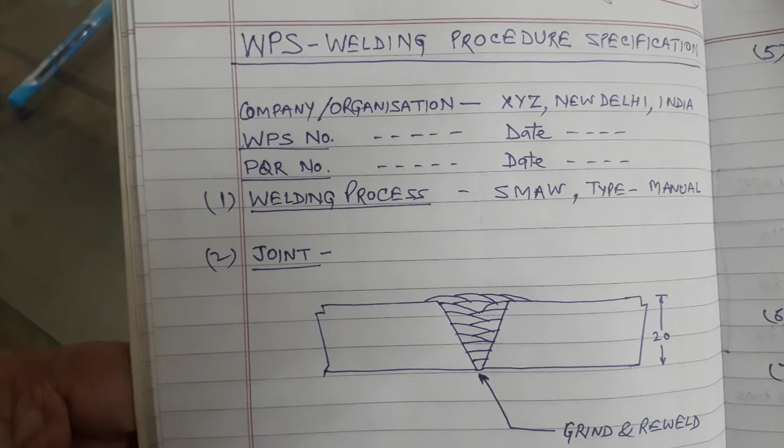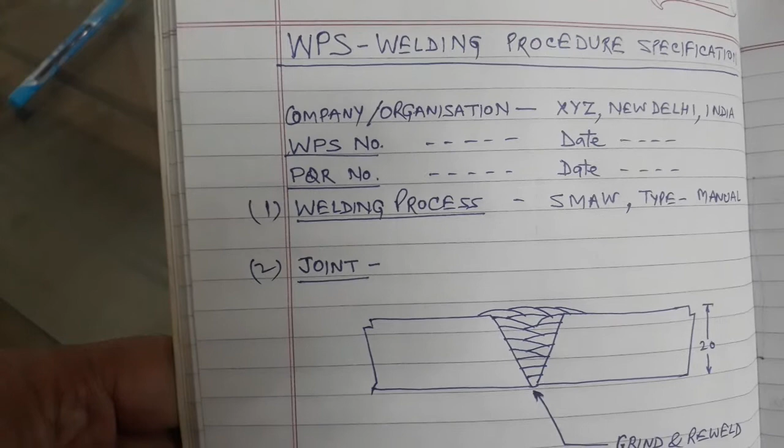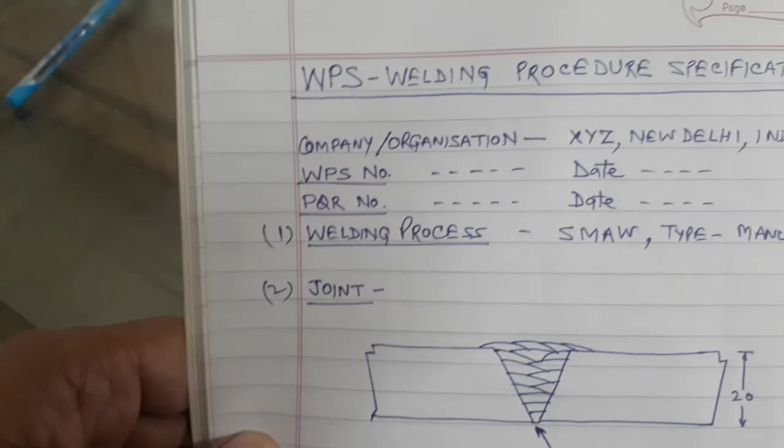Hello friends, this is part 2 of WPS, welding procedure specification. This topic I have covered before, but you could not see any document or figure, and I felt that in the absence of a document you couldn't have followed it well. So as an afterthought, I decided to make it in a document format so that it will be better to understand how WPS looks like. Now you can see it is in a documented format.

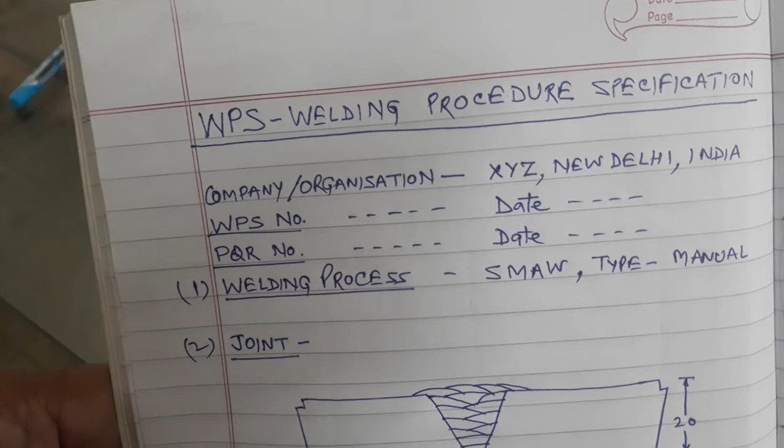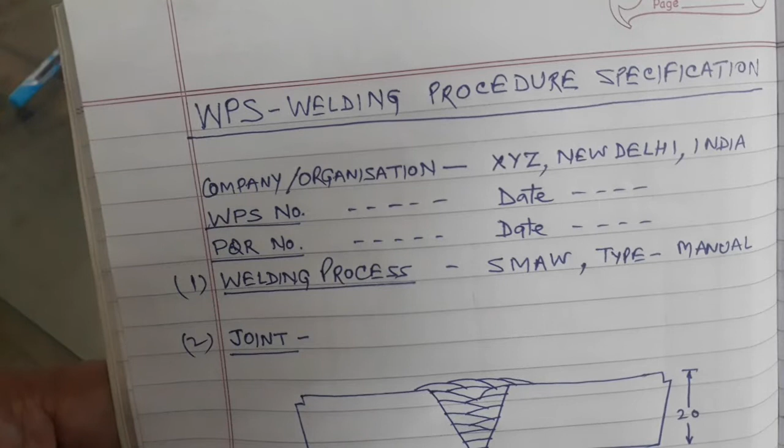On top of this WPS document, the first thing which will come is the company or organization's name. Now here you can see that it is XYZ, New Delhi, India. That means a company will give its name.

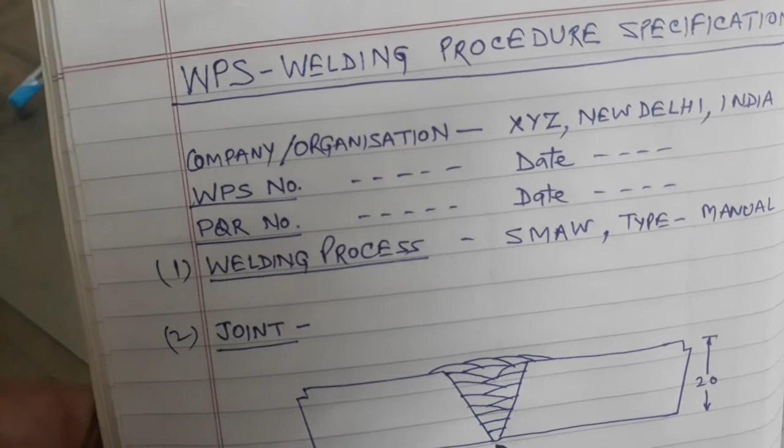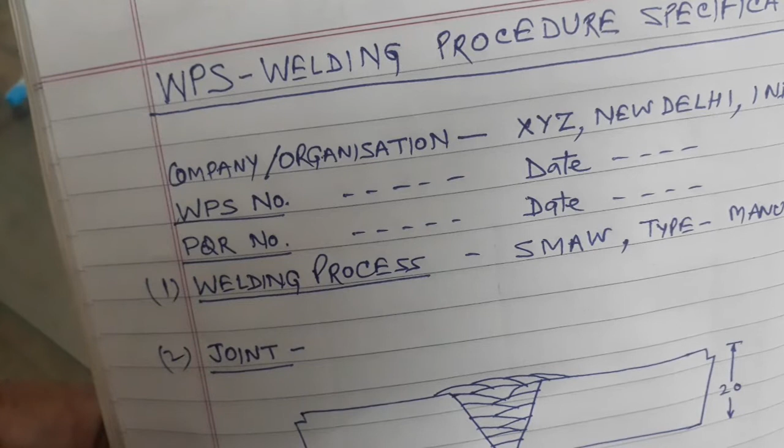Now the next thing which will come is the WPS number. Any number which the company feels can be given so that it is easily retrievable and understandable. So different companies adopt different methods to allocate the WPS number, and that is how the WPS number is given, and then comes the date.

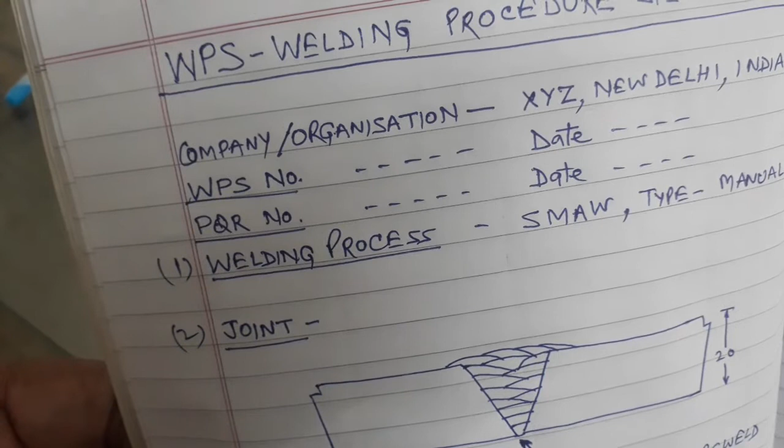Now next comes the PQR number and its date. This PQR is from where this WPS has been made. That means the basis of the WPS is this PQR, that is Procedure Qualification Record, where all the tests and procedures followed during making the procedure have been documented, and that supports this WPS. So that's the PQR number and its date.

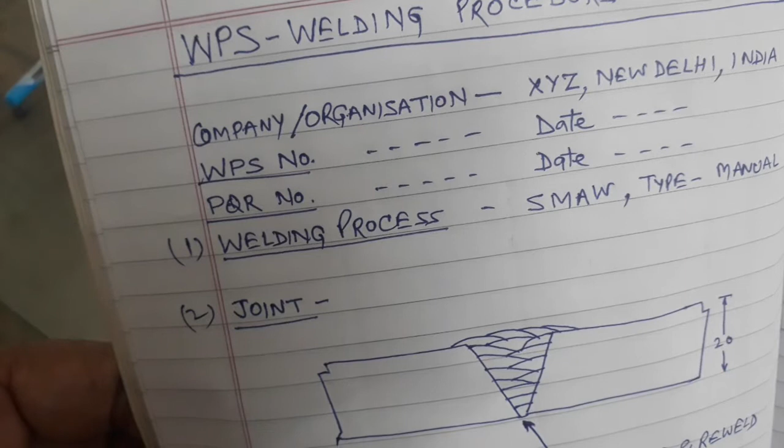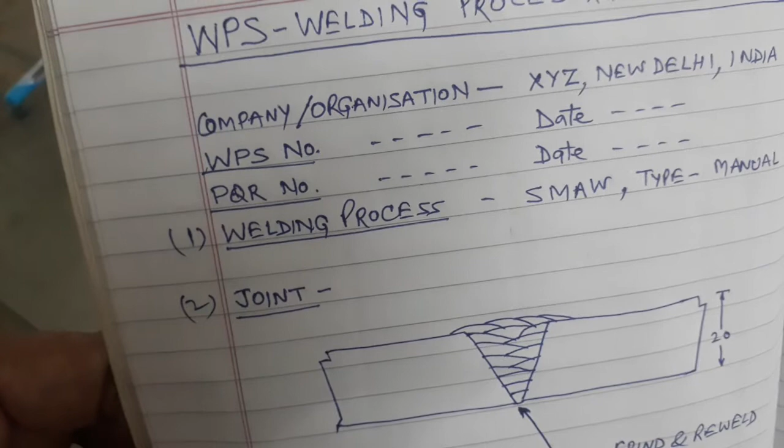So after these details, the variables start. What we see here is the welding process, the first variable. So the welding process here is SMAW, type is manual.

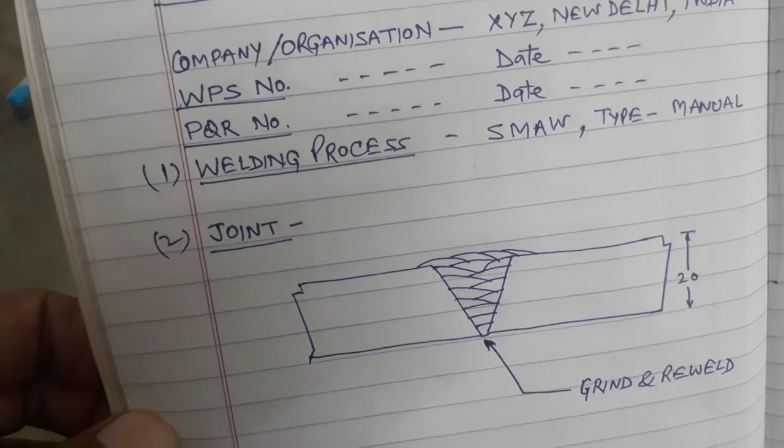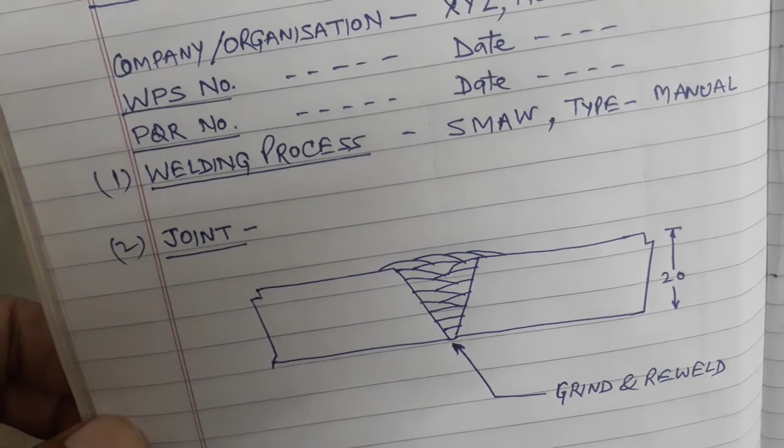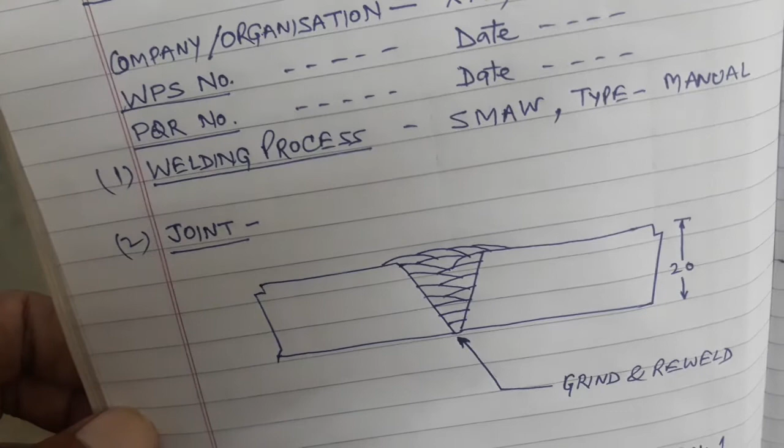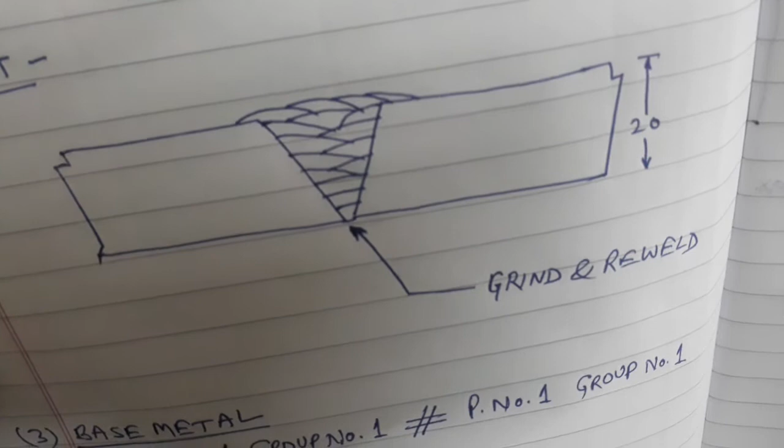Now the next variable is joint. This WPS has been made for some 20 mm thick joint. So there is a figure which the welder can follow. There are passes and layers described, and there is some instruction also that after welding is over, how the welder will do the reverse side, because the root is not properly fused, and to fuse the root properly, the welder has to grind it and re-weld. So that is the instruction given here: grind and re-weld.

Now the next variable is the base metal. So this WPS is made for P number 1, group number 1, and it is to be welded with P number 1 and group number 1 base metal.

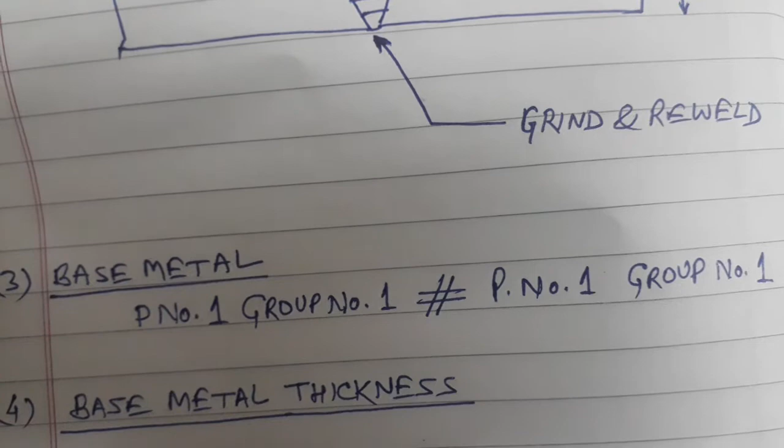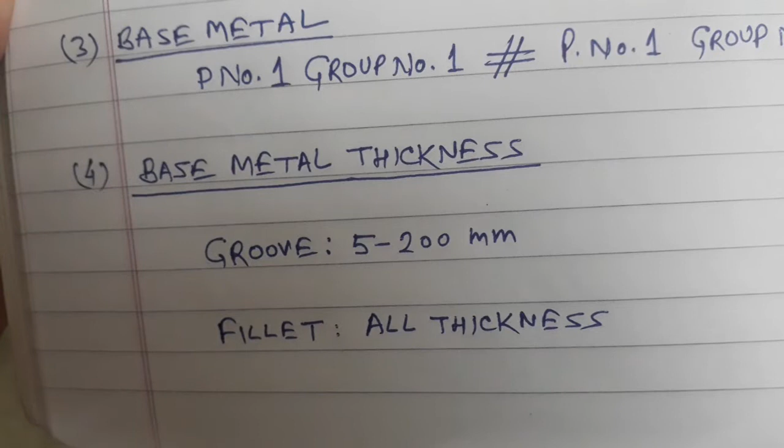Next variable is base metal thickness. So this base metal thickness for groove, the range is 5 to 200 mm, and for fillet joints, all thicknesses. That means any thickness can be welded with this WPS.

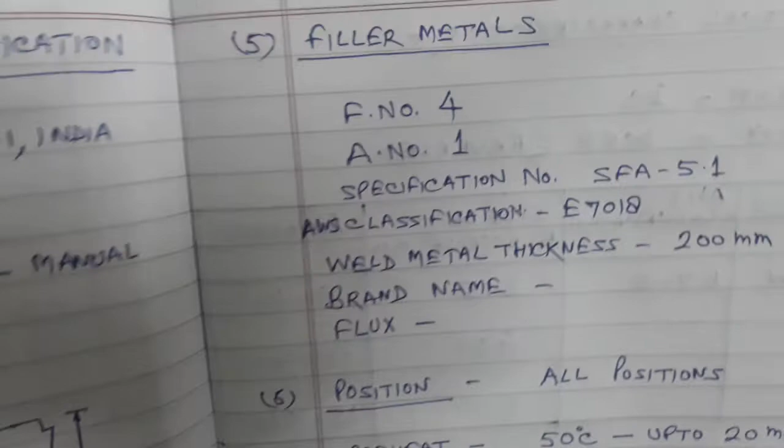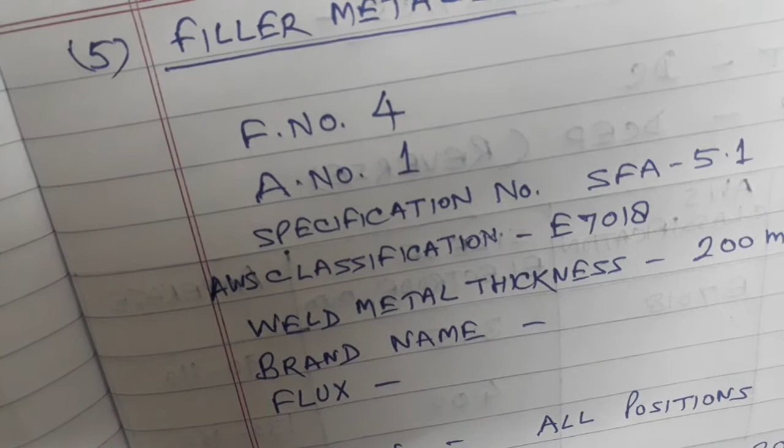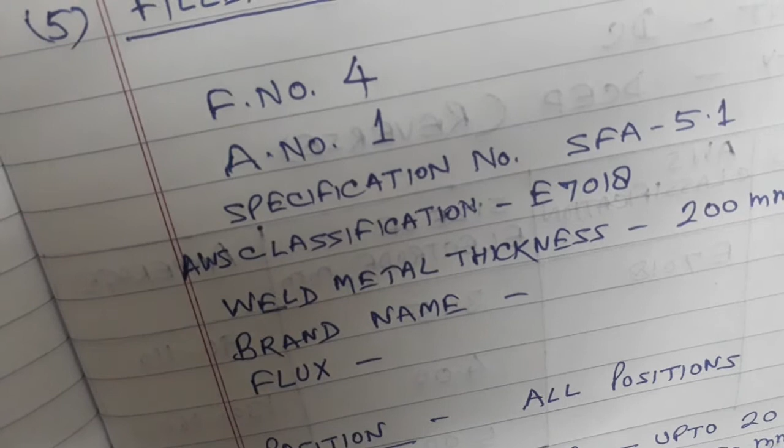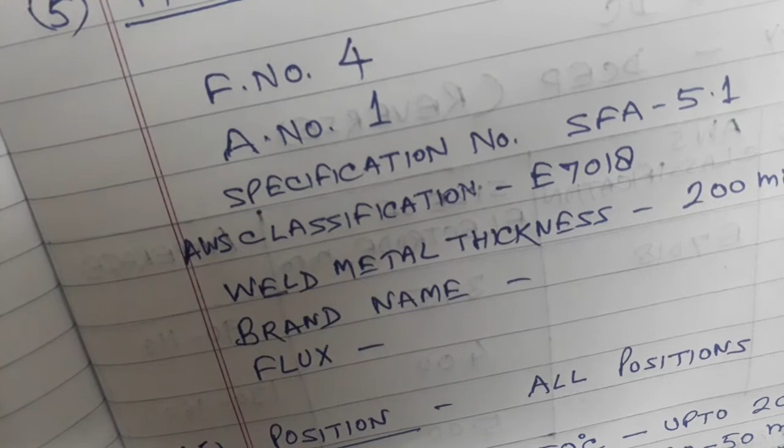The next variable in this WPS is filler metals. Now you can see filler metals are described with F number. F number is 4, A number 1. A number is the deposited weld metal chemistry. This A number and F number come from Section 9, the ASME code Section 9, which guides how to make a WPS. So there, against filler metals, F numbers are given in a tabulated form, and in the same way A numbers are also given in a tabulated form.

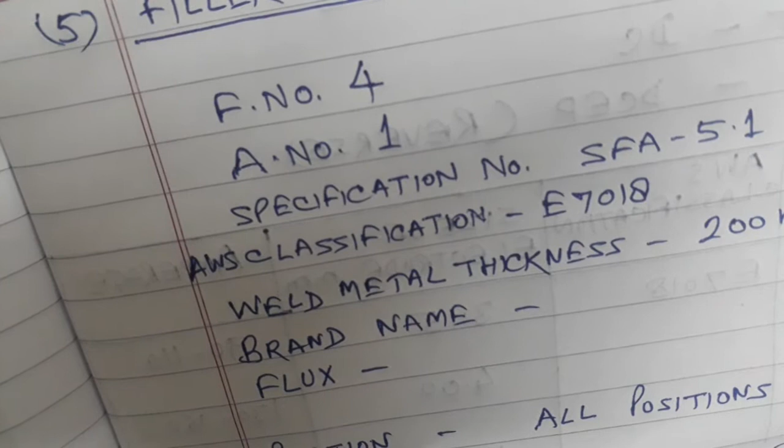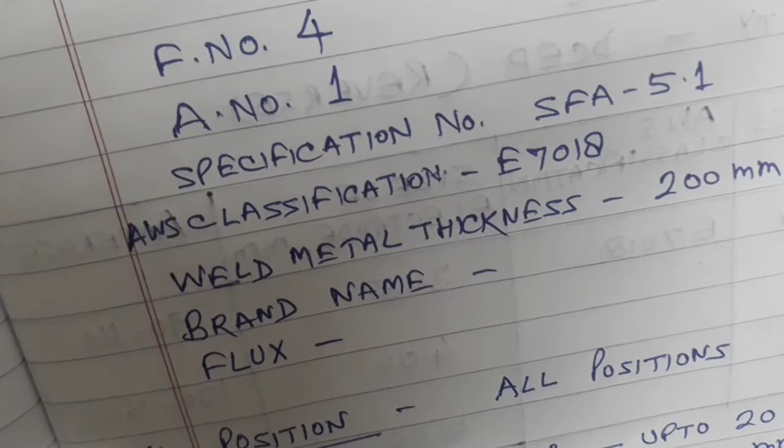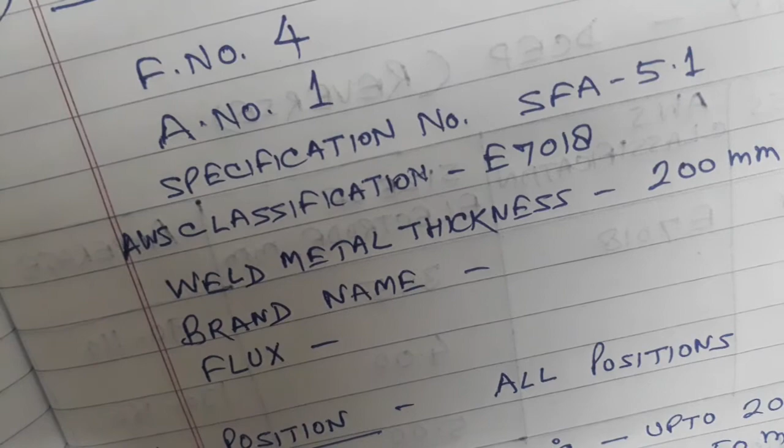So depending on the chemistry of the weld metal, A numbers are allocated. For example, F number 4 and A number 1 are carbon steel electrodes. You can see down below how these electrodes have been specified further. Specification number is SFA 5.1, and AWS classification is E7018. That means the electrode which will be used for this joint will be E7018.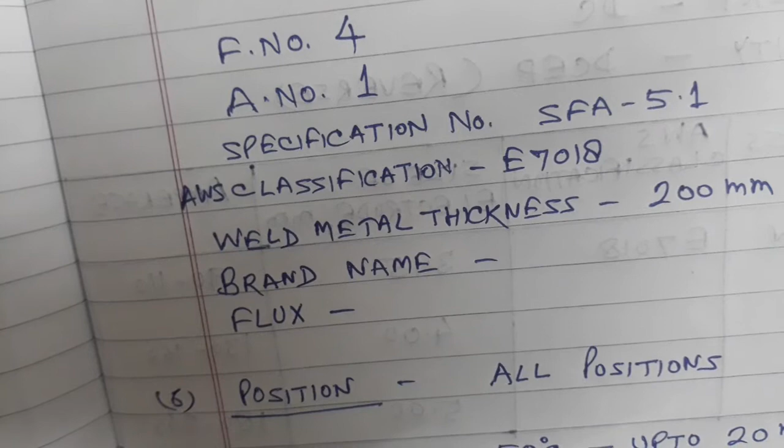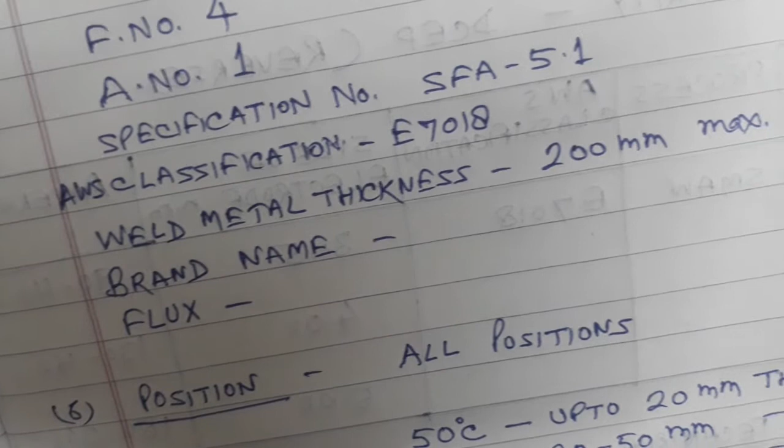Weld metal thickness which can be joined is 200 mm max. That means this WPS is made for up to 200 mm thickness, though the current job carries only 20 mm thickness. It is the current job for which this WPS has been given that carries only 20 mm thickness.

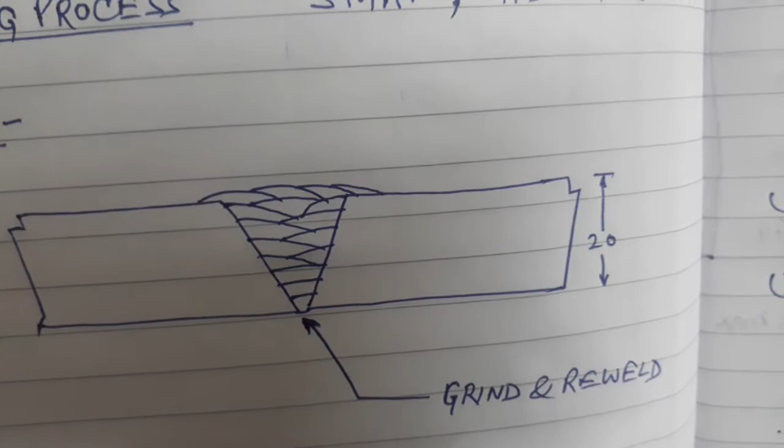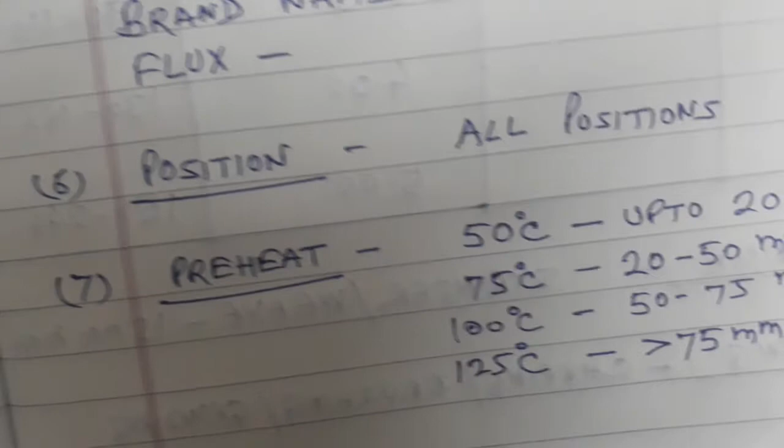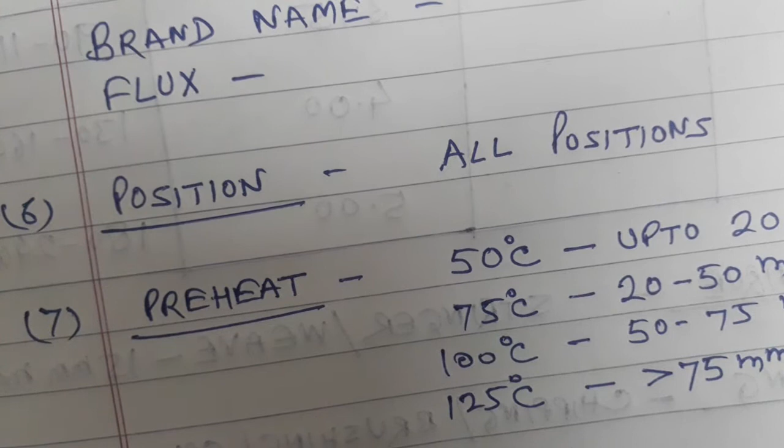The next variable is position. This WPS has been made for all positions, and this applies to groove welding as well as fillet welding. That means for any groove or fillet welding in this job, in any position, welding can be done. The only condition is that the welder also should be qualified in that position.

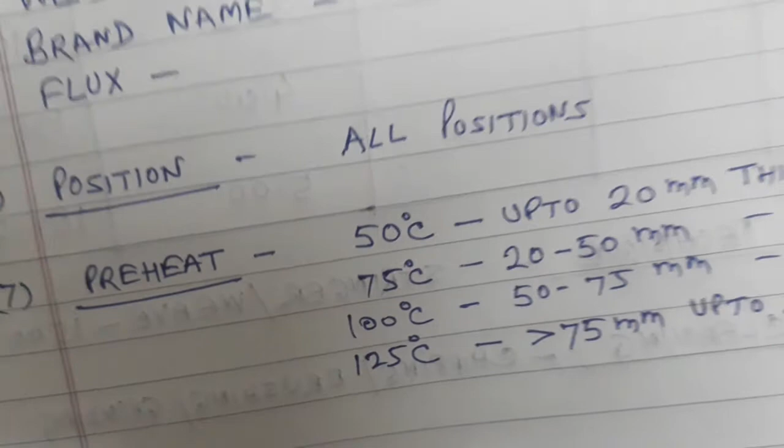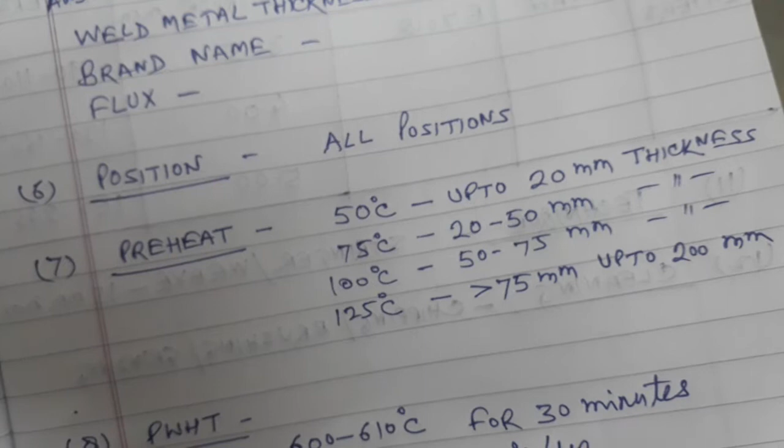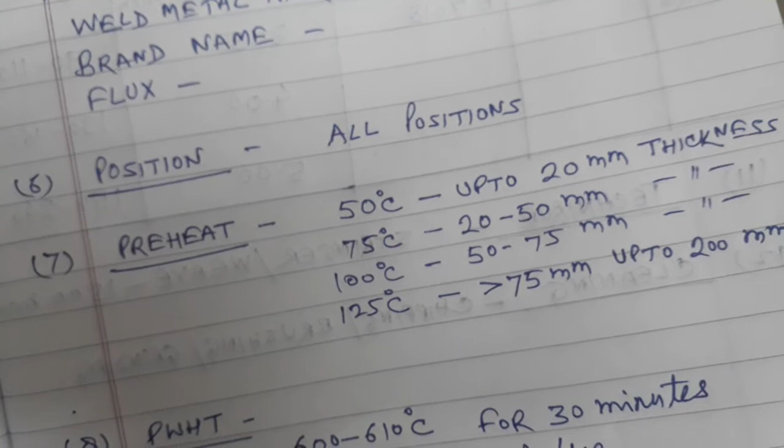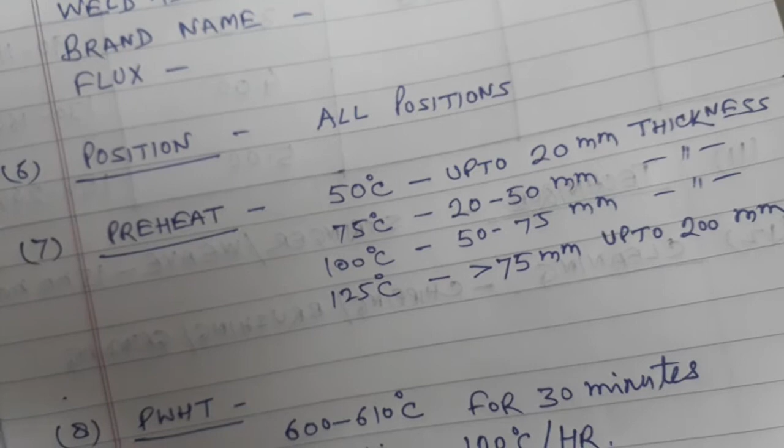The next variable is preheat. According to the thickness of the job, preheat ranges are given. Up to 50 degrees Celsius heating will be done for thickness up to 20 mm. If the thickness is more than 20 mm and up to 50 mm, it will be heated to 75 degrees Celsius. If the thickness is 50 to 75 mm, the job will be heated to 100 degrees Celsius. And if the thickness is more than 75 mm and up to 200 mm, it will be heated to 125 degrees Celsius. Since this WPS is made for up to 200 mm thickness, all these ranges of thickness and the corresponding heating requirements are given under this variable, that is preheat.

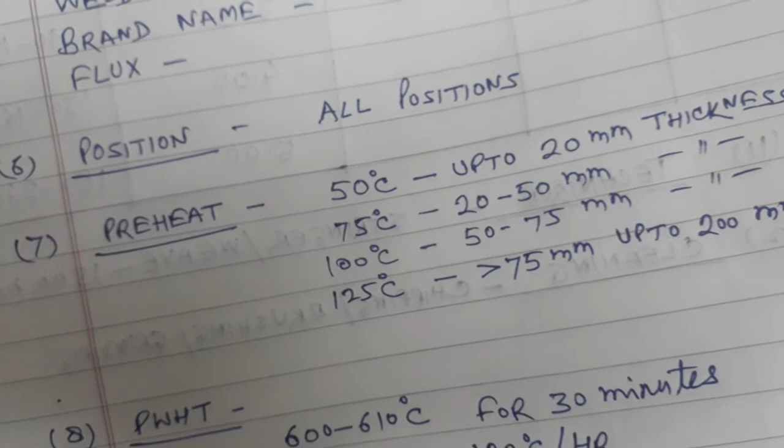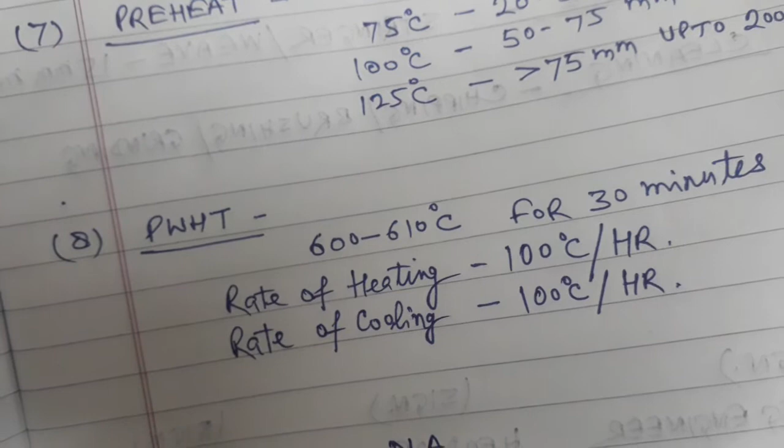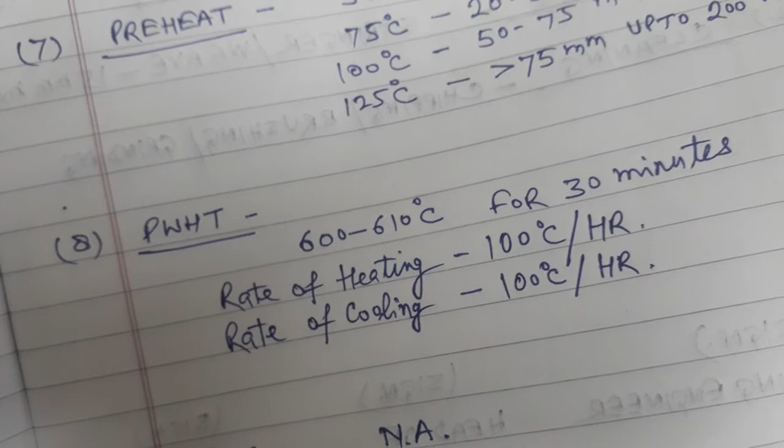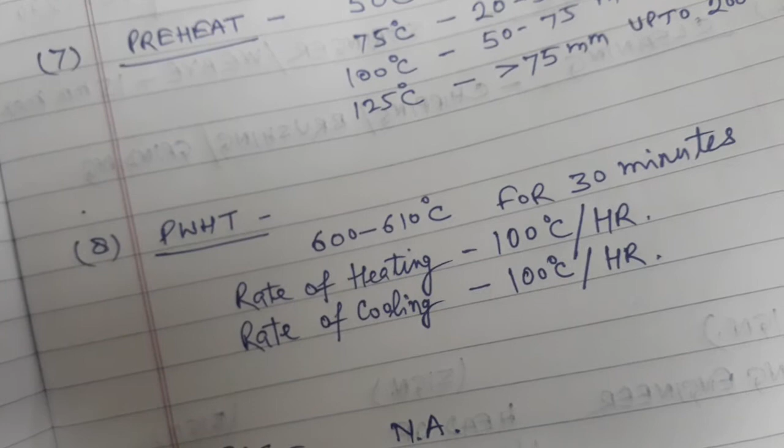The next variable is PWHT, that is post weld heat treatment. We also call it stress relieving heat treatment. The parameters are 600 to 610 degrees Celsius for 30 minutes. Rate of heating is 100 degrees Celsius per hour maximum, to reach this temperature of 600 to 610 degrees Celsius. Similarly, after heating for 30 minutes, that is the soaking time, the job will be cooled at the rate of 100 degrees Celsius per hour, not more than this. So this is how PWHT is described in the WPS.

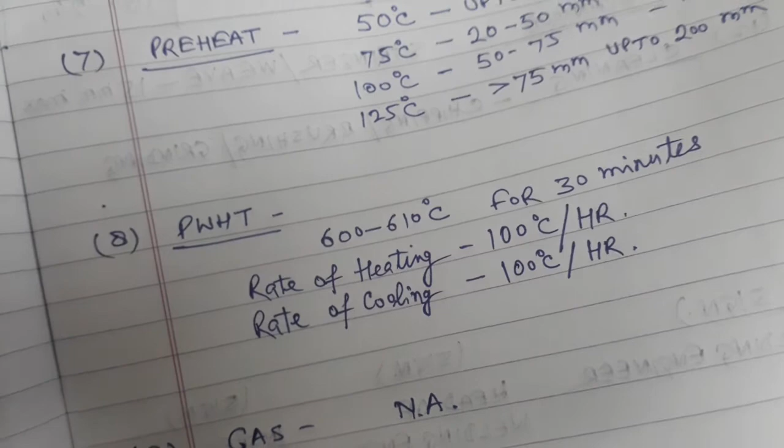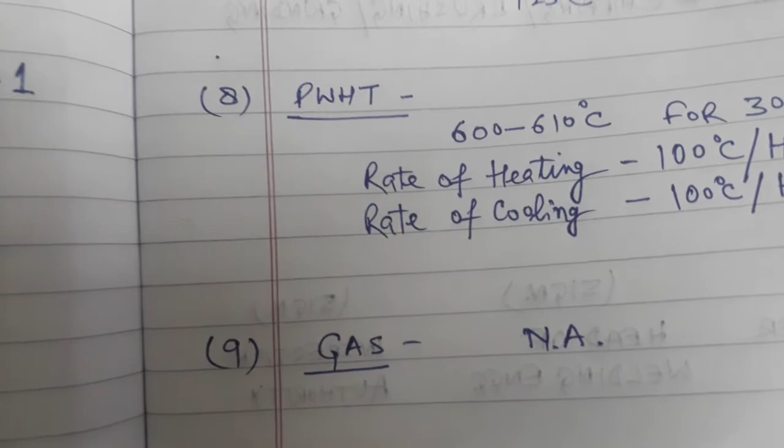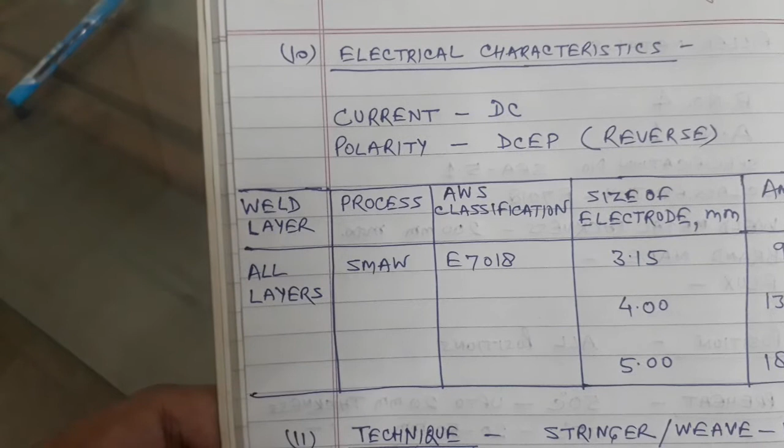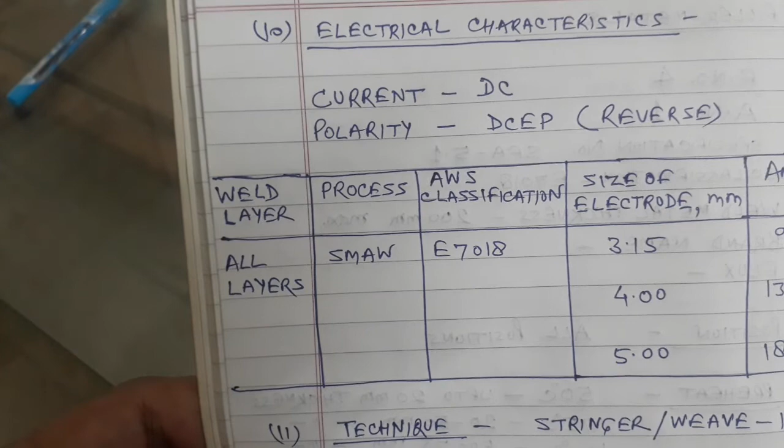Gas, since this is SMAW process, is not applicable. Next parameter is electrical characteristics. Current will be DC, that means direct current, and polarity will be DCEP, that is reverse polarity. You know, DCEN is straight polarity and DCEP is reverse polarity.

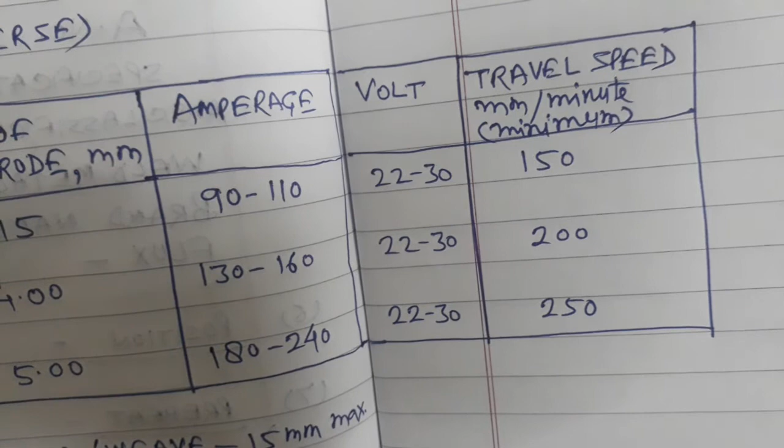Then about welding, how the welder will proceed: weld layer process, AWS classification, size of electrode in mm, then amperage, voltage, and travel speed. These are the columns given in a tabulated form. This will help a welder decide, for a given size of electrode, what amperage and voltage is permitted, and how he has to restrict the speed of welding.

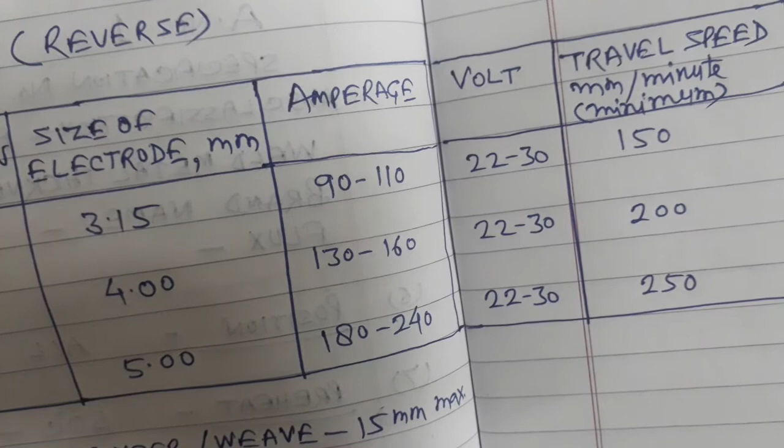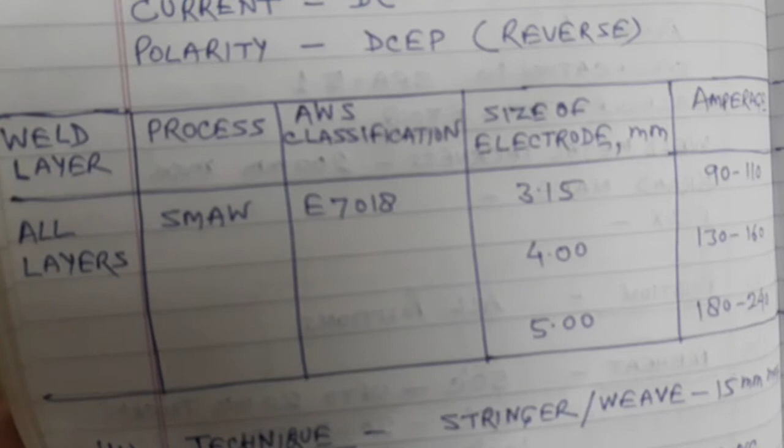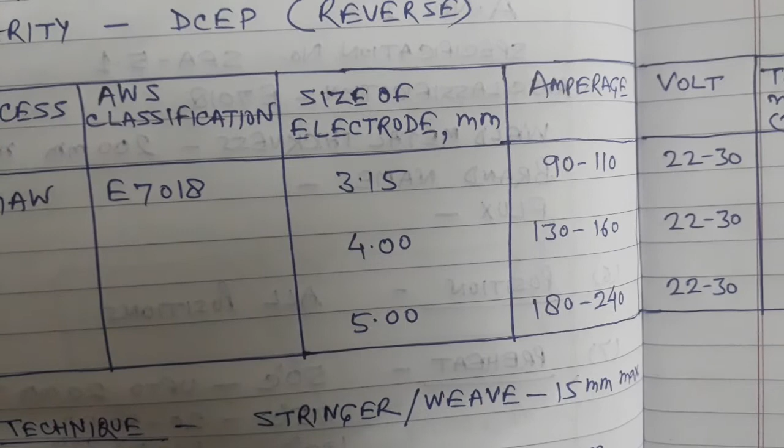For all layers, process remains SMAW, and AWS classification is E7018. Size of electrode 3.15 mm, amperage 90 to 110, voltage 22 to 30, and travel speed 150 mm per minute minimum. That means a welder has to weld at least 150 mm in a minute.

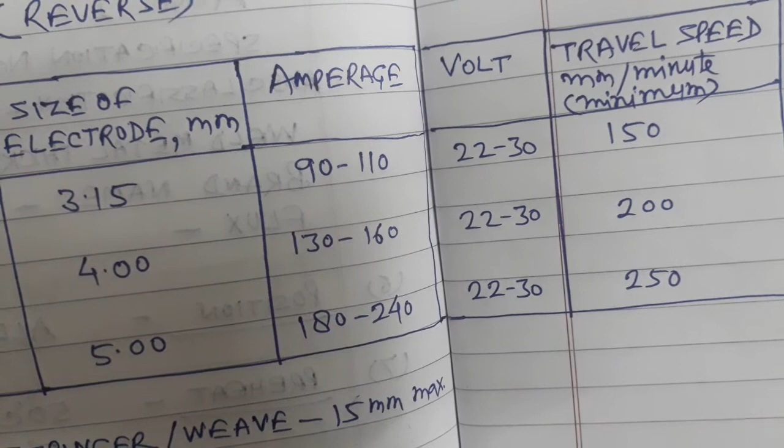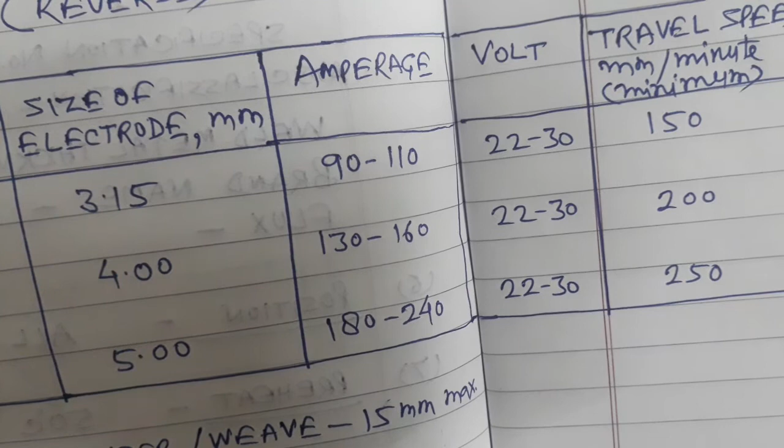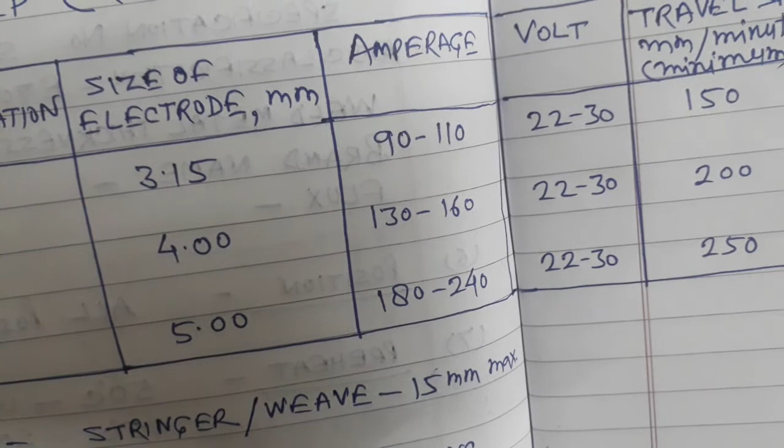Similarly, for 4 mm thick electrode, amperage is 130 to 160, voltage is 22 to 30, and travel speed is 200 mm minimum. And for a size of electrode of 5 mm, amperage is 180 to 240, voltage is 22 to 30, and travel speed is 250 mm minimum.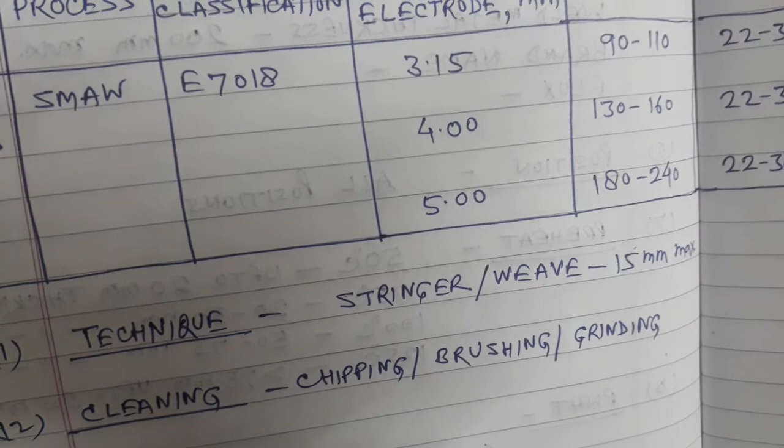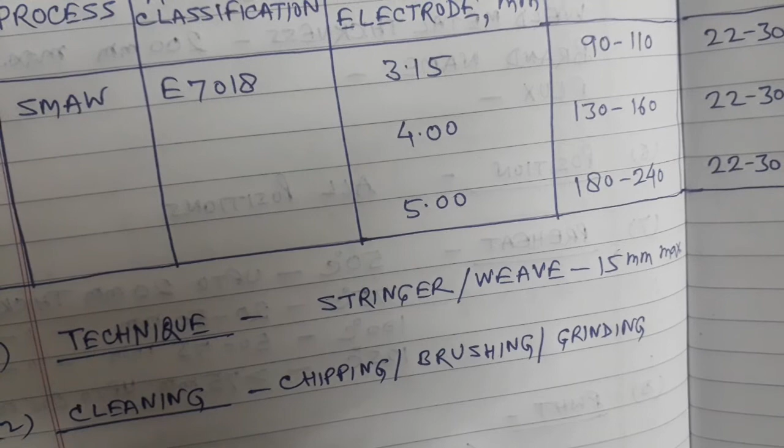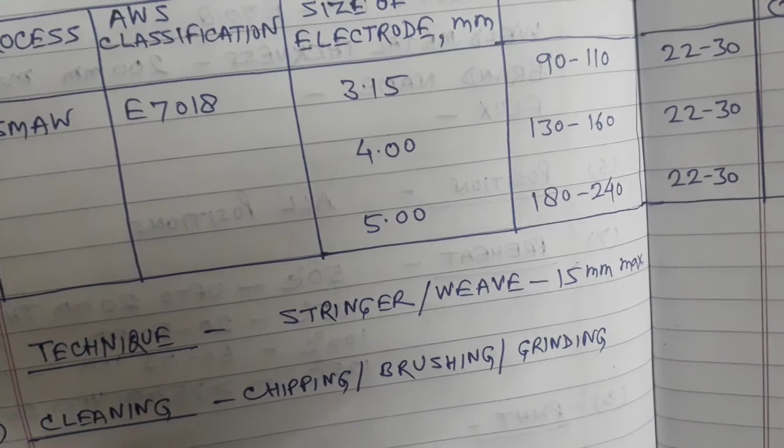Next variable is technique. If a welder is doing welding straight without weaving, this is called stringer. And if he is weaving, that means moving the electrode from one end to the other end of the groove, this is called weaving. Both techniques are permitted, and the limitation of weaving is 15 mm max. He cannot go more than this limit while weaving.

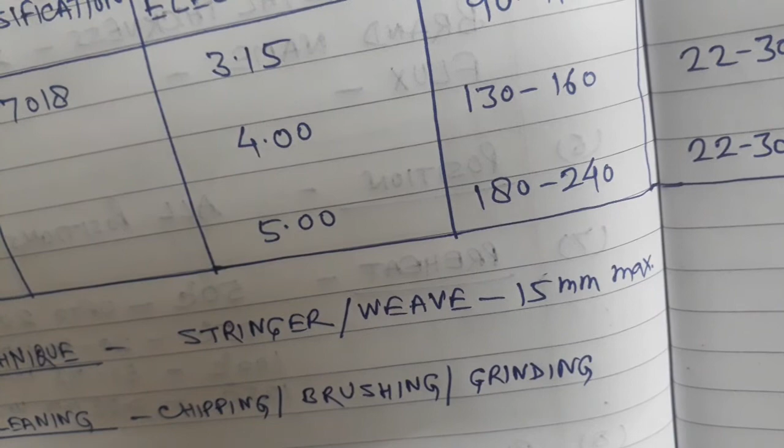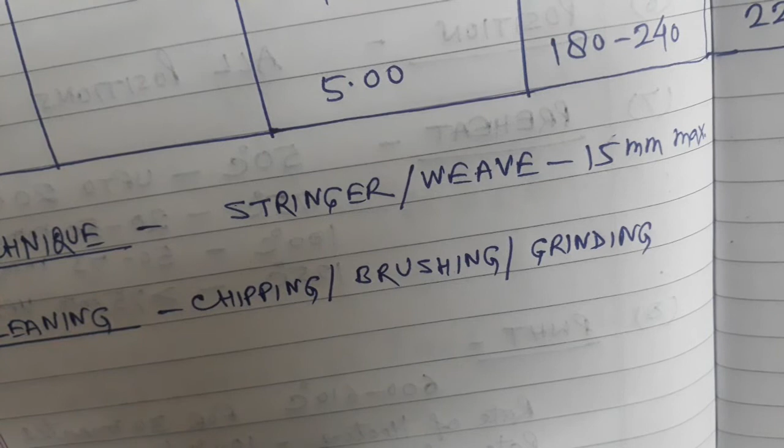And the last variable is cleaning: chipping, brushing, grinding. Anything can be accepted while cleaning the weld, before welding, during welding, and after welding. All these three methods can be applied to clean the weld.

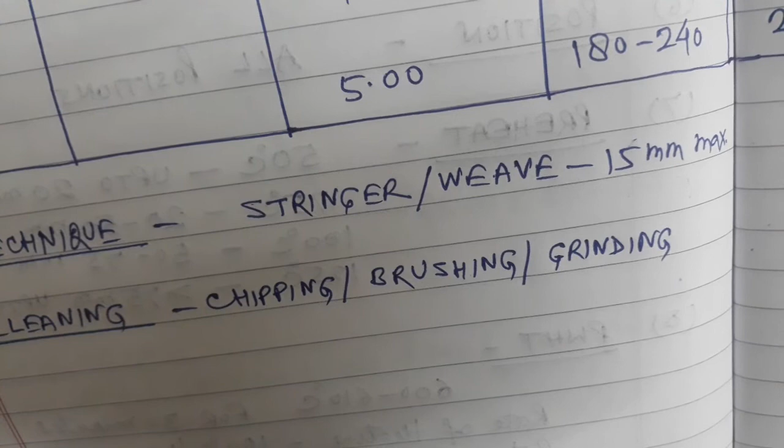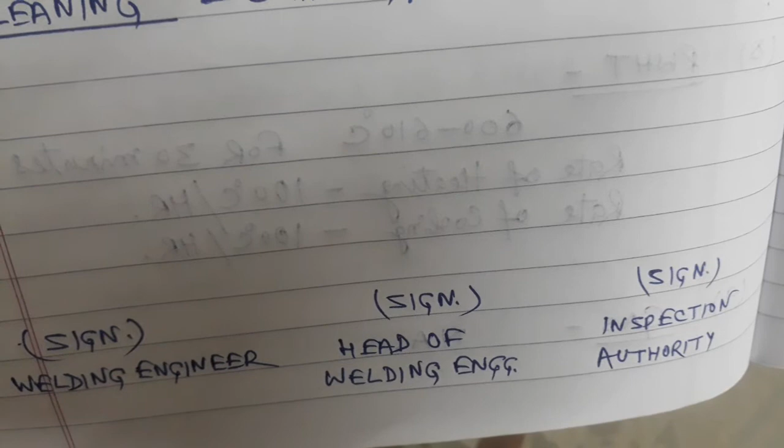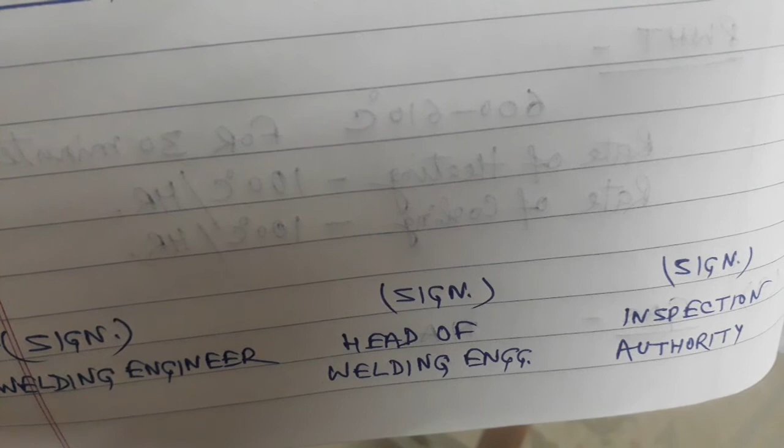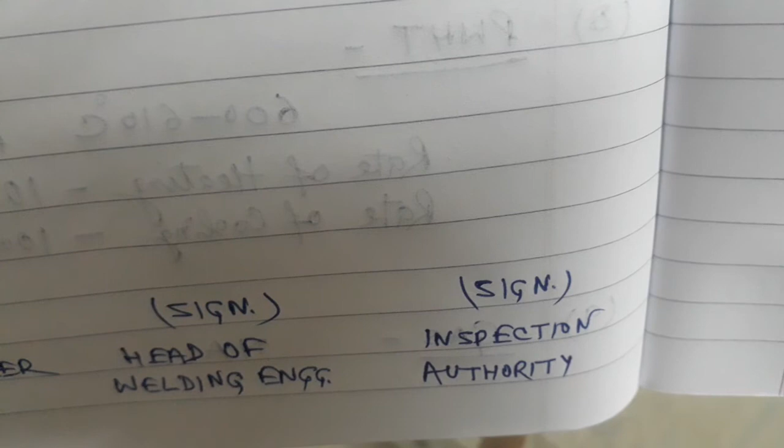At the bottom, there are signatures. One signature is of the welding engineer who has made this WPS. Then it is reviewed and signed by the head of welding engineering. And the signature of inspection authority, if applicable. It is not mandatory, but in most cases, when the customer demands, this WPS is required to be certified by the inspection authority. So this signature of inspection authority is included.

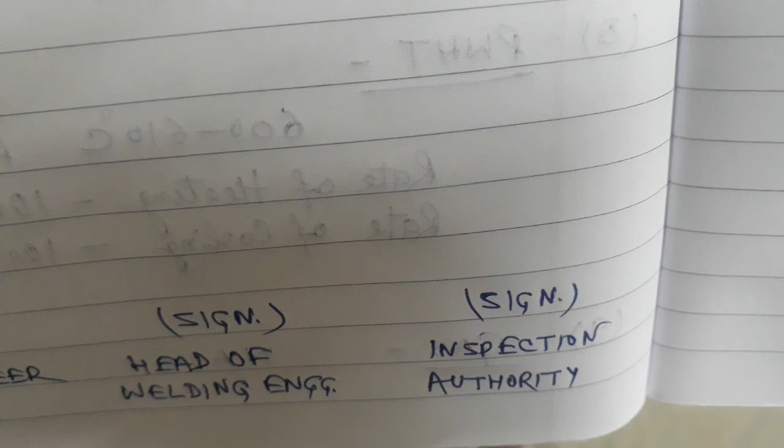So this was part 2 of WPS. Hope you liked it.